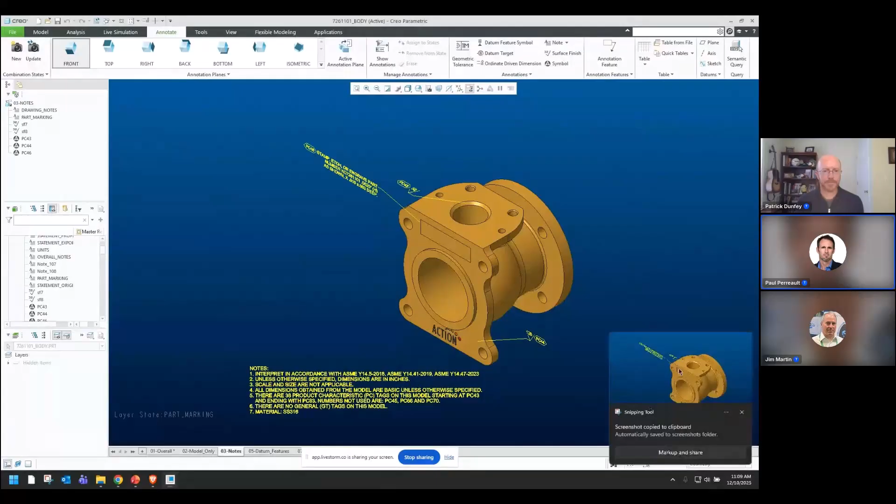And they might add comments or boxes or other types of graphical markup, and then paste that into a PowerPoint document and send that to other folks they're collaborating with. The activities-based collaboration capabilities we see here were really mimicking that type of user experience, that type of use case.

So these are what we call snapshot comments. If I wanted to create a comment, I could go and upload a photo or something like that, or add a markup to a 3D model. This whole process of using these markup tools is really to create a snapshot of the state of the model on screen, along with whatever graphic overlay markups somebody might make.

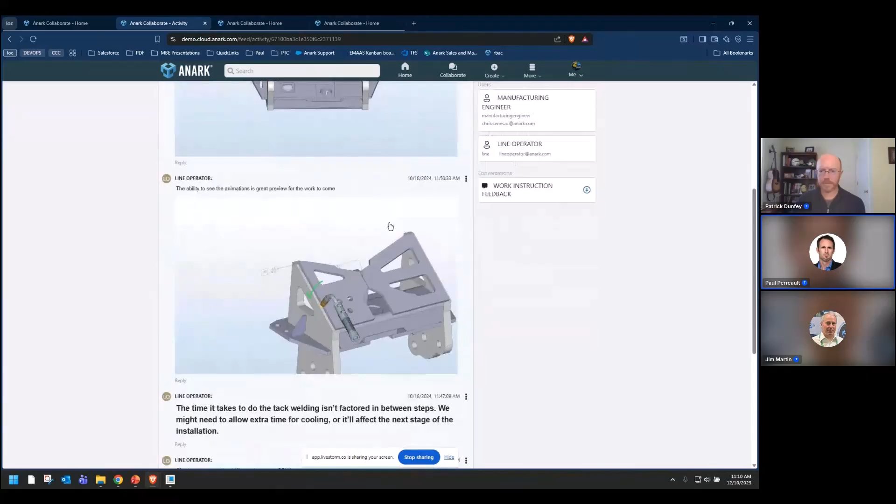So I'll exit out of this. This is primarily a time-based feed, if you will, where the things I do here are captured in a timeline, again sort of mimicking that PowerPoint slide-by-slide type interface.

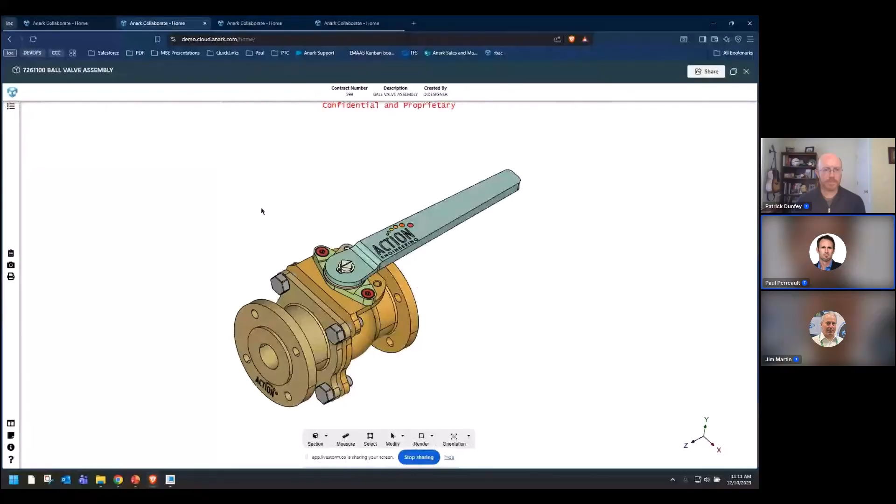So what we've introduced is this concept of content-centric collaboration. The whole idea is to really enable people to view, interact, and make graphical markups right here within this digital environment. And this is just a publishing template - some people might be aware of the templates that can be created for 3D PDFs, things like that. This environment has similar capability.

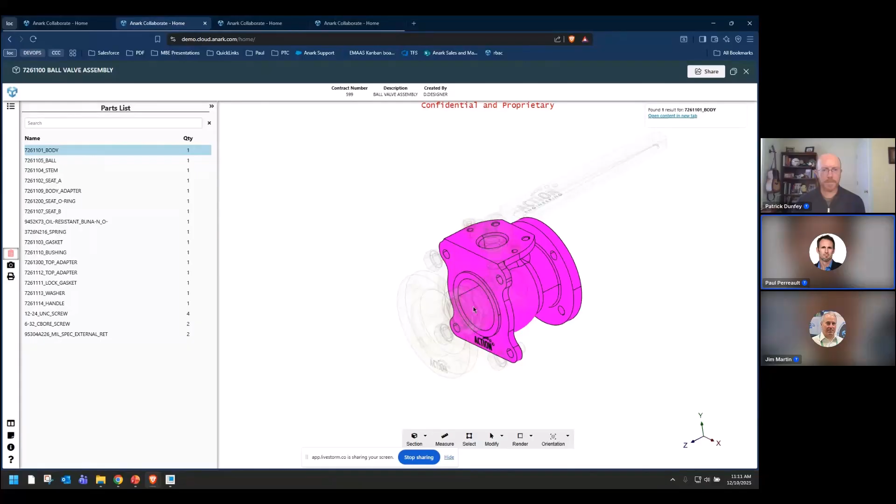Right now I'm using some keyboard shortcuts to activate different panels or widgets on the left. I can interrogate this model just like you would in a 3D PDF or what have you. This also includes some capability where I can select on parts, and in the background the system is actually doing a search to see if there are any parts that meet this criteria in the system.

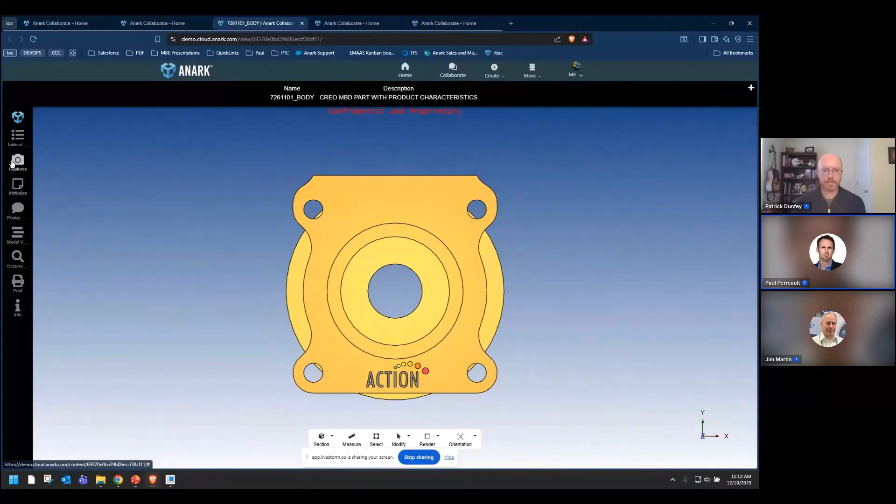And so it found one for this. I can hover over this link here and essentially display a preview of all the attributes in this particular part. So if I wanted to open up that detail part, I can just click the link, and then here I go - I'm now interacting with that detail part that's been published into the system. That's where all the dimensional characteristics are for this specific component.

And again, just want to shout out our friends at Action Engineering. This is a great assembly.

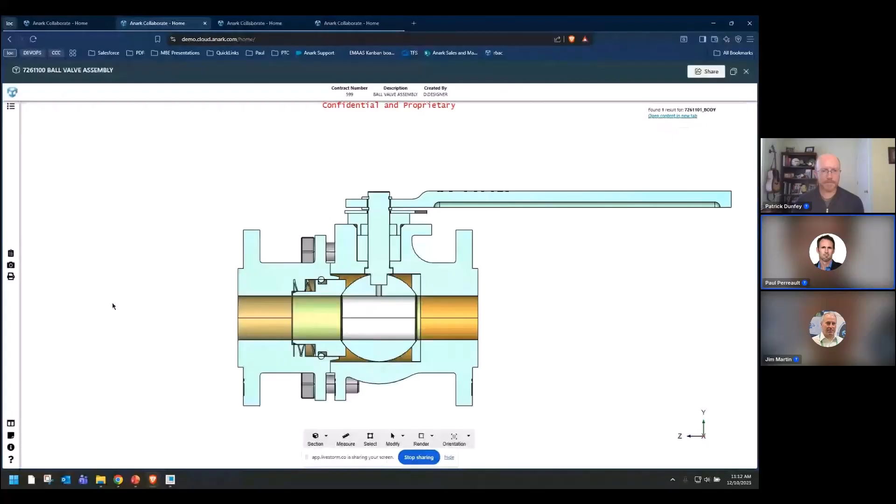Some of the other keyboard shortcuts that I have here, of course I can activate different views, things like that. I can hit those again and collapse that panel. If I want to print, we have printing capability, which is going to create what we call some derivatives from that 3D digital model definition right here from within the product - no need to create drawings beforehand.

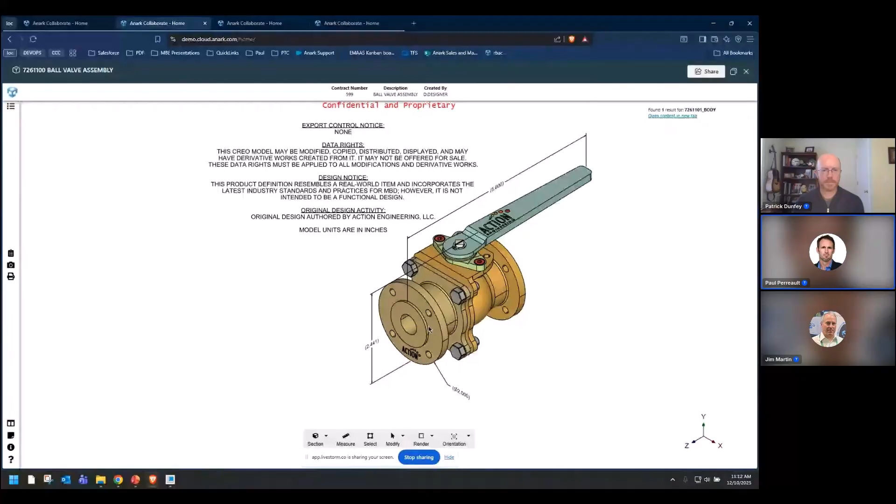So I'm going to go back here and activate this view. There's a number of different things we can do here to interrogate the model. I might want to zoom into this part, or select another component and zoom in, or perhaps hide it, show it. There's also things here.

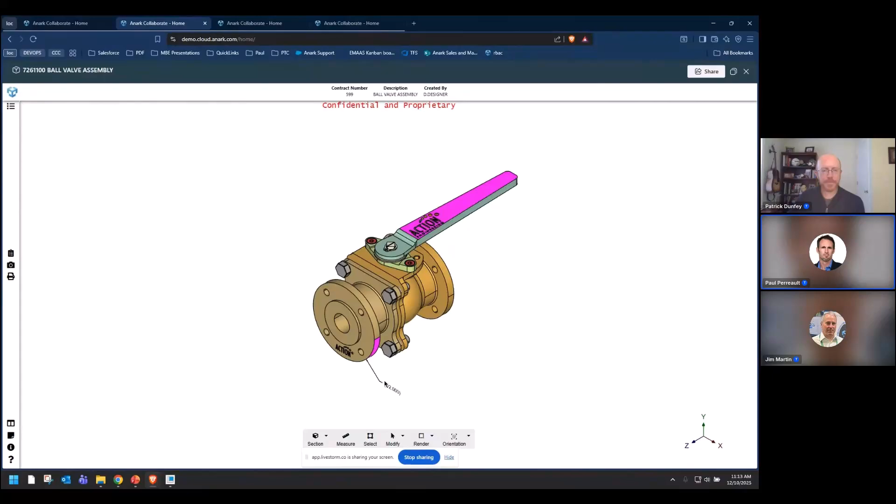Let me just select some of these parts, and I will hide those GD&Ts and those notes. The reason I'm doing this is that if I'm collaborating, there might be a particular view or state of this model that I'd like to create before I make a comment or something like that. So I'm just showing off a bunch of these capabilities built into the solution now. I'll just hit the R key, which will restore that.

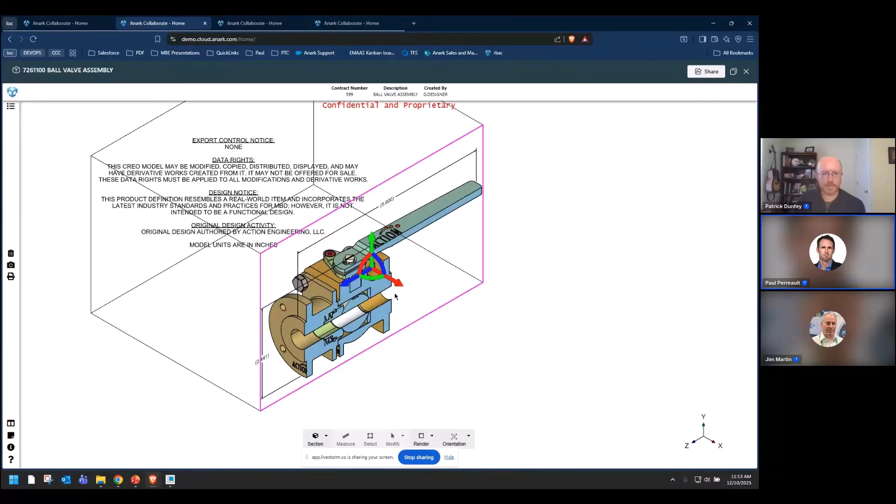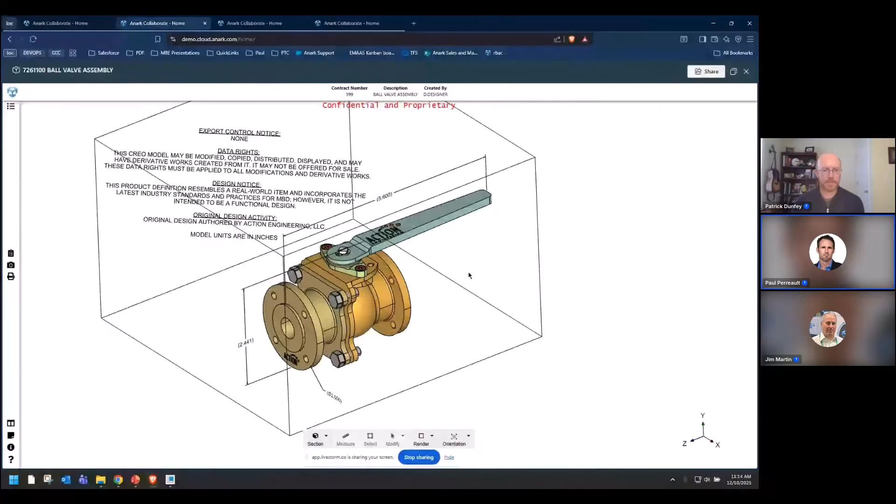New as well is a live sectioning tool. So I can just open up this section tool, and I've got six different planes that I can section. I can also rotate this tool to cut the model in any arbitrary plane I wish, and of course create what some people call box sections - really sectioning across multiple different planes to create a state of the model. This is all available as part of this new content-centric approach.

And you might have seen some of these tools before. We've got what we call a courtesy measuring capability within this environment. We're going to be adding perpendicular measurements, angular measurements, and others coming in 2026, and we're really excited to add those to these environments.

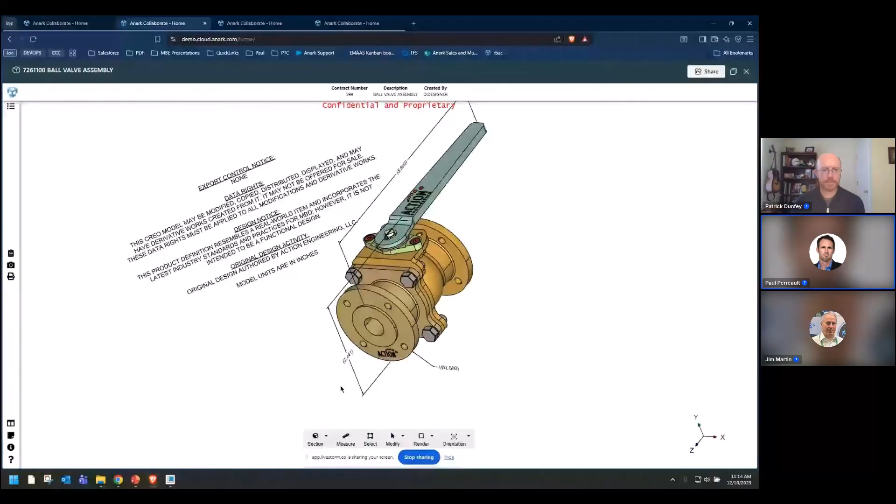Now the question is, as I've shown, I'm kind of in this read-only mode where I can interrogate the model, look at the BOM, click on things, get this sort of interactive behavior, interactive cross-highlighting and things like that. So what we have added is this way to now collaborate on this model.

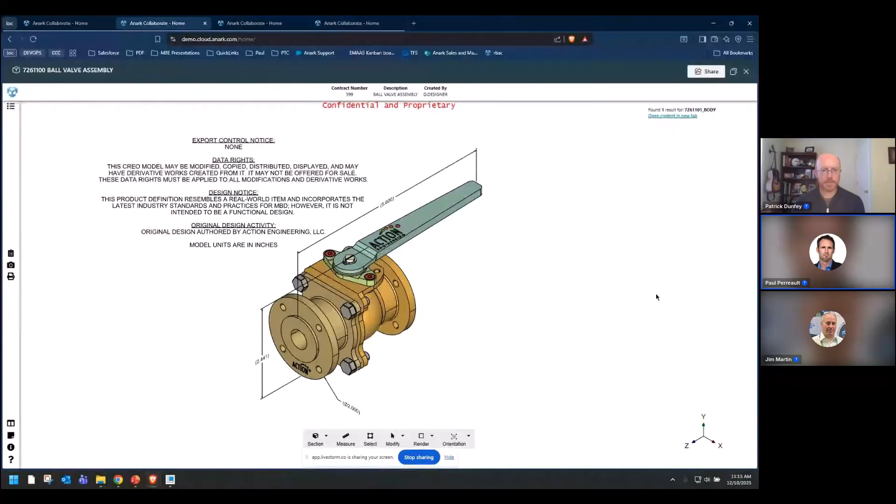So I'm going to come over here and click the share button. When I do this, it's going to ask me if I want to add this to an existing space or a new space. I'll just create a very new space here - let's call this the Ball Valve Collaboration, or CCC. I'll just give this a description of demonstration.

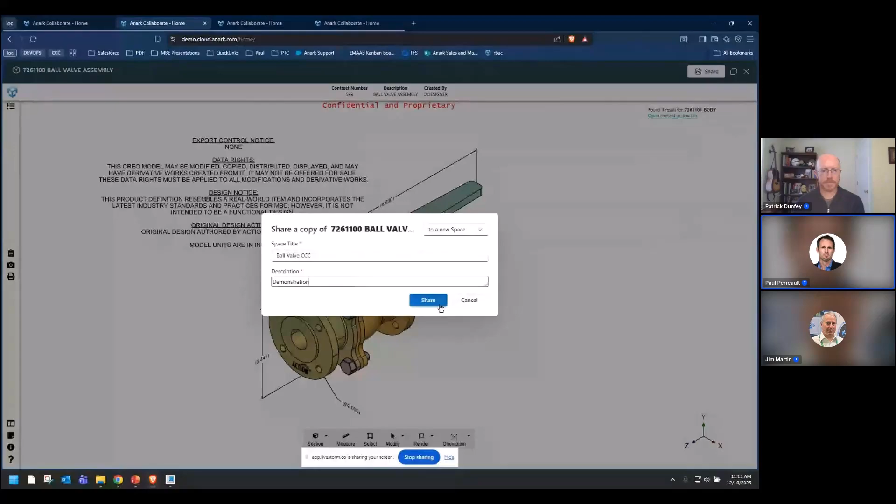When I click the share button, what's happening is it's creating this silo of information that only contains this model. So this is a container—you could think of it as a folder, but it's actually a container. And within this container, I can upload additional files, add folders, and fill those folders with things I upload from my desktop or what have you. More importantly, I can come in here to the space details and start adding additional groups or users in the system.

So I've got a user in the system that I know is a supplier, and for that supplier I will give them certain permissions within this space. They'll be able to view the items in the space, review, add markups and comments to items in the space, and they'll be able to download items that are in this space.

So again, what I've done here is created this—if anybody uses Box or Google Drive or things like that, I've essentially got a container, and I can share the contents of that container with a discrete list of individuals or groups. And for each individual or group, I can enumerate the different access permissions that they have within this space. Now that I've added some users, I'll take you through some of the capabilities here. This environment now supports what we call 3D and also overlay, or 2D, types of comments.

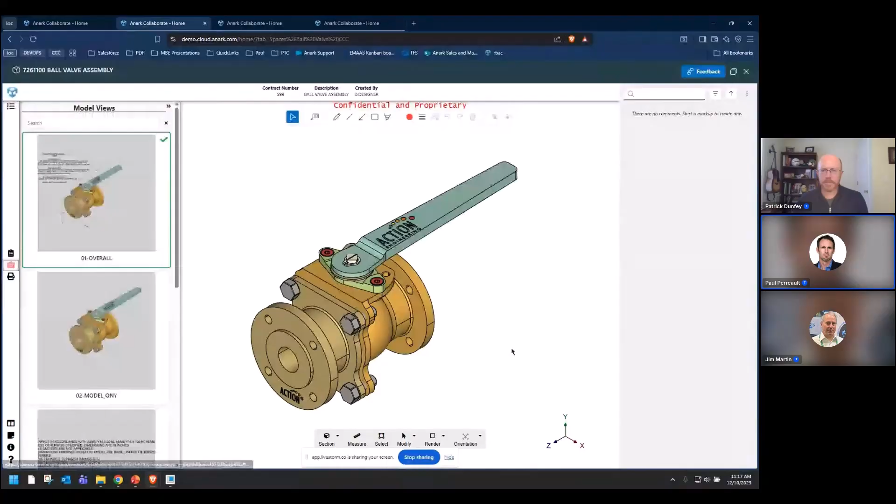So for the very first thing, maybe I'll select this part and zoom into it real close. Maybe I've got something I'd like to say about this particular part, so now I'll say what is the PN for this item. That is now a 3D comment that exists within this environment.

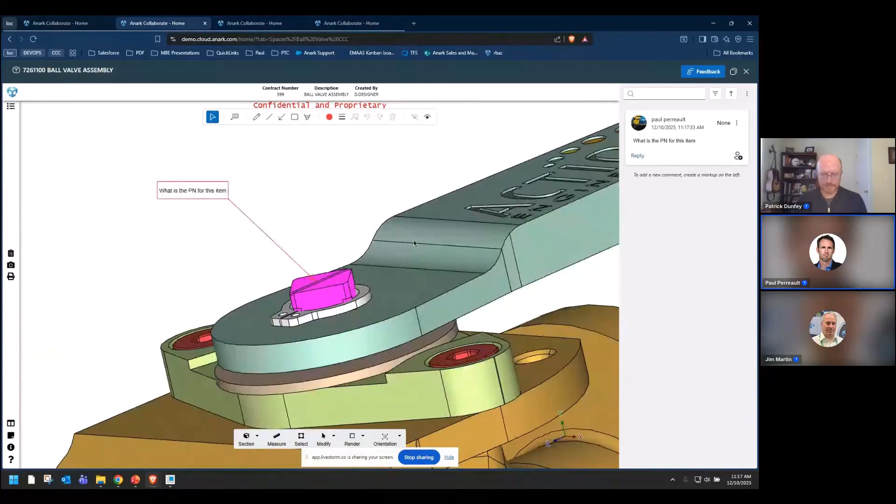Just as an example, I'm going to add what we call an overlay comment. Down here, I'm going to hit the restore button, which restores the original state of the view I was in. Maybe for this I'm going to isolate this particular part, zoom in, and now I've got what we call an overlay markup. I'll just say a nice logo, and accept that.

So what makes this an overlay? It actually exists in 3D space, but what it's doing is capturing the configuration of the scene I'm in, and adding a markup on top of that. You can see here when I rotate, that markup disappears, because it's essentially pinned to the orientation of the model, or of the view, when I create that comment.

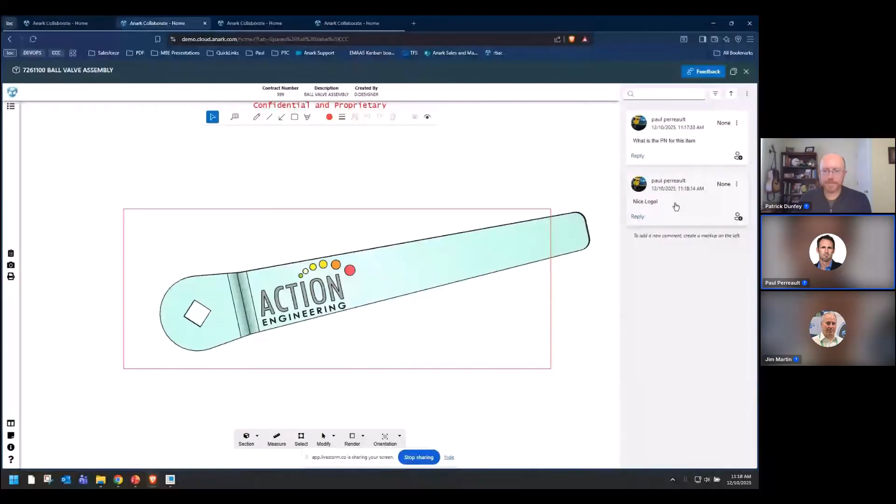Now I'm going to close this down here, and let's open up one that I've done a little bit more.

Hey Paul—yes. Real quick, just as I'm seeing you go through a lot of these things, in that last example you kept reorienting yourself back to the overlay markup. How were you doing that? I think I saw you clicking the things on the right, but I'm not sure exactly if everybody saw how you were doing that so you could get back in there.

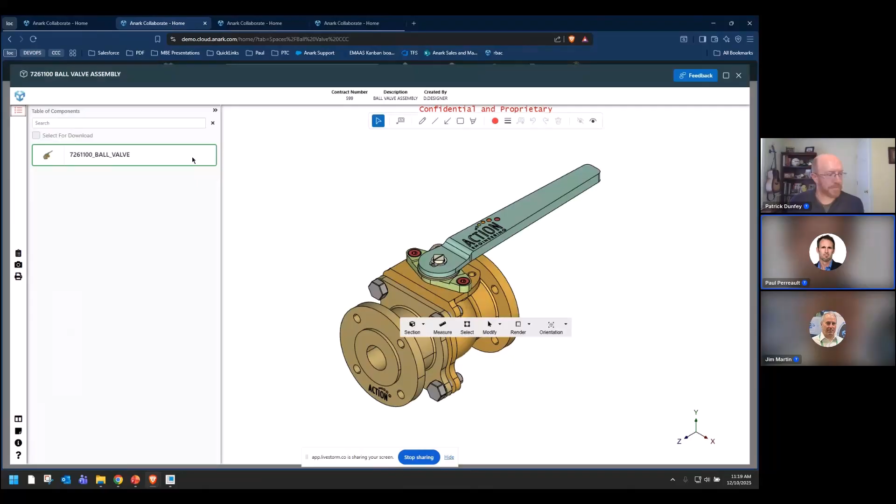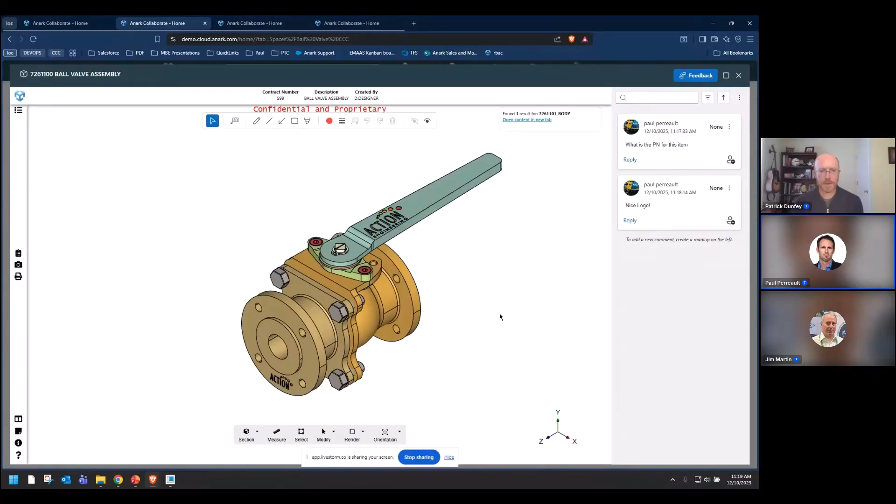Yeah, so great question. Let me just close down the table of components there. So every comment corresponds with a graphical markup that's been created either as a 3D markup or as an overlay markup. Here I'm in the live 3D digital environment, I might choose to hide something or isolate it, and I'll hit the R button to restore. But now when I click on one of these comments, it takes me back to the view and state of the model that comment was created in.

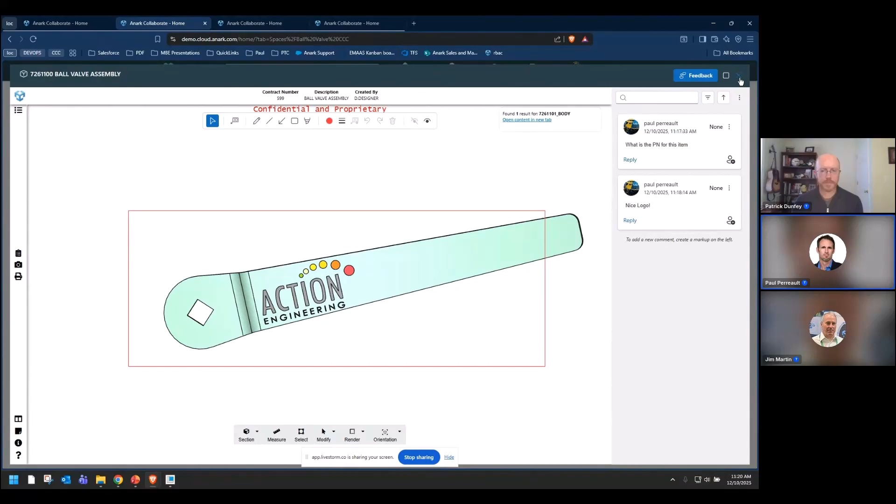So again, I can zoom in and out here. You'll see that this is what we call a flat-to-screen type note. And if I wanted to, I could come over here and activate that overlay markup again. Now, probably the better place to show this is in the context of a more elaborate, more fully defined collaborative experience.

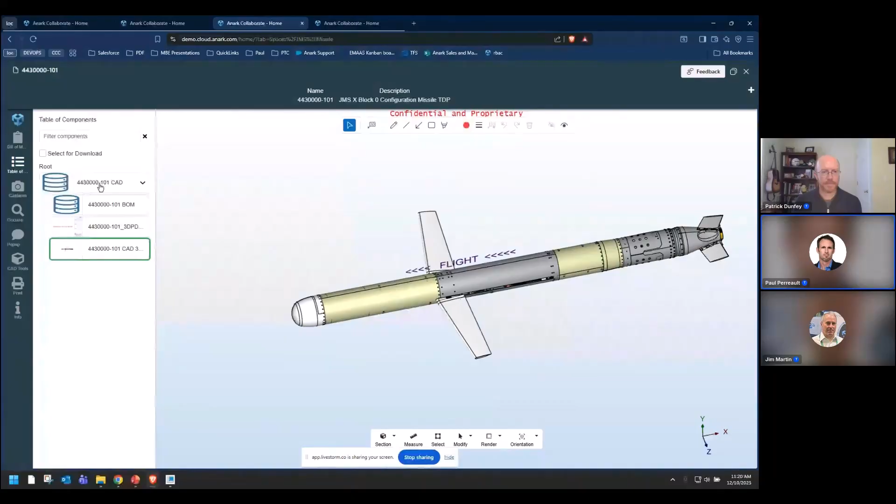So what we're looking at here is a complete missile. This is probably about 1,000 occurrences, a couple hundred components. This was published out of Windchill, and in doing so, you can see here that we've got this hierarchical representation of information.

So this is what we call a top level cover sheet, which contains PLM attributes that were harvested from the WT part in this case. It also includes a bill of material, again harvested out of Windchill. As I mentioned, there are several hundred unique components in this structure, and so this is the full recursive bill of material, not just top level. This is data, again, not CSV, not Excel.

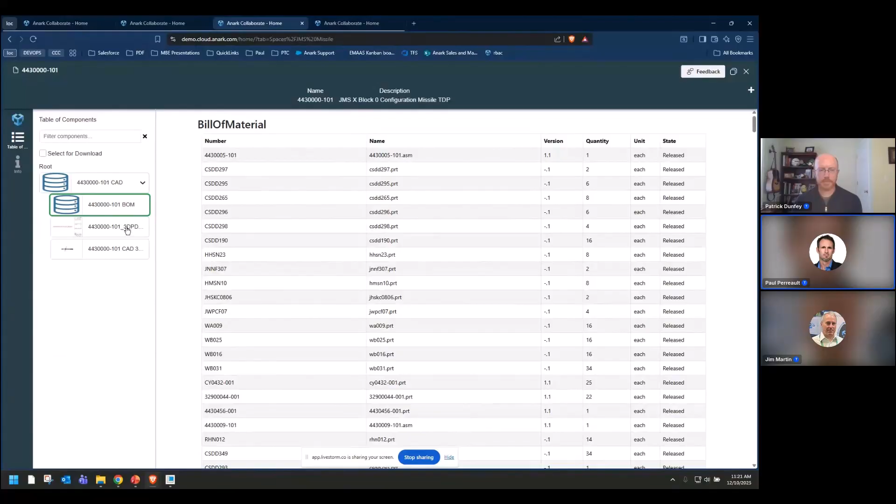This is data that was harvested right out of Windchill. The integration also published a 3D PDF as part of this package, but then also provides this interactive digital environment here. So what I'm going to do now is turn on the feedback panel, and you can see here that there's about 20 different comments and replies that have been made.

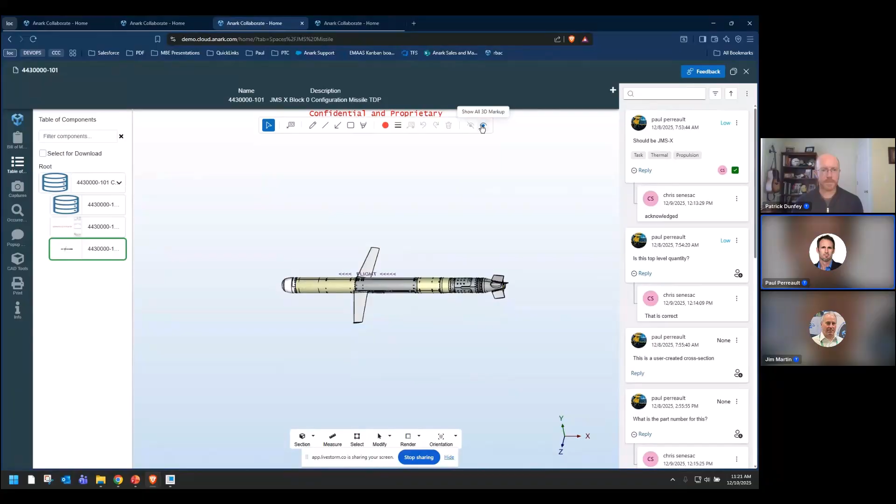While I'm in this environment, I have a couple of different ways to see all these comments happening in this content-centric environment. The first thing I'm going to do is click this button, which will show all of the 3D comments that have been created in one view. You see here I can rotate this model and see these different pinned comments attached to various places within this missile. One of the great things about this environment is that there's this sort of cross-highlighting relationship.

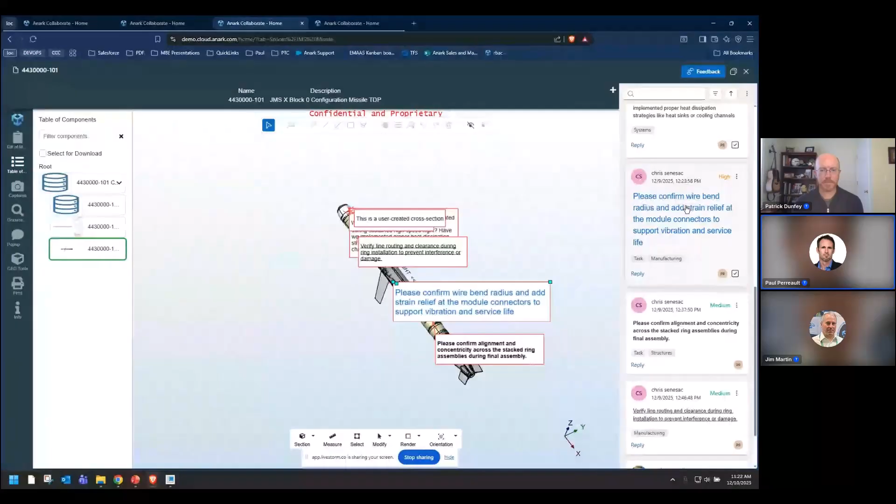I'll click on one of these items, and you'll see here that this comment turns red. I'll do that again - you see there's a red border that comes and highlights that comment. This provides me a way to see that this comment corresponds with that item in the comment history. When I see that, I can click on this item, and now it will activate that saved configuration and saved view of the state of the model when that 3D comment was made.

Just to be clear, this is a real 3D comment. This is not a snapshot, not a capture. This is a flat to screen note that has been created and pinned to this particular wire harness. And of course, this comment here is asking, hey, do we need a strain relief piece of hardware to maintain the bend radius of that cable?

Each one of these items in this list corresponds to a different component here in this data package. Starting at the top, this was a 2D, what we call a highlight type comment, where I just highlighted this text and typed in a comment: shouldn't this be JMS-X? You can see here that Chris replied to that and acknowledged it.

There's also an indicator here that this item has been completed, and I'm going to show you some capabilities in just a moment to disposition and adjudicate all the comments that people make in these collaborative exchanges. This one relates to a selection of text in this PLM attribute data.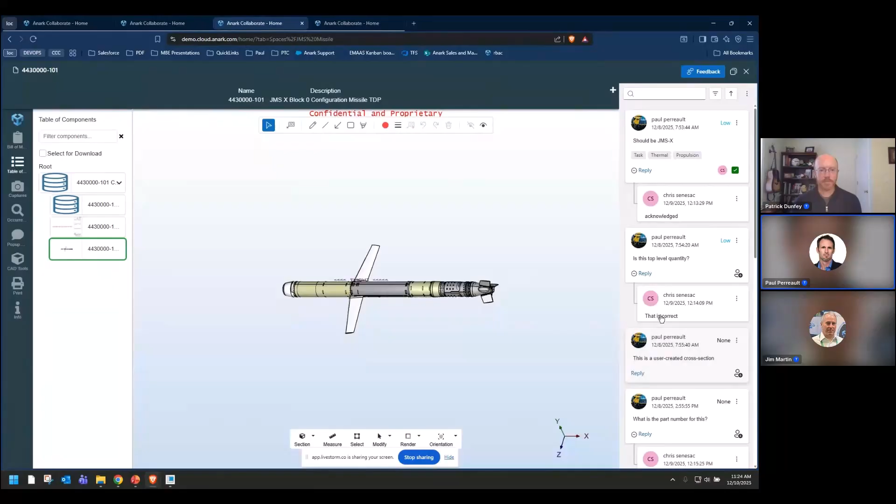And then here again, this is another comment - a 3D comment in this model that is actually using a user created cross section, using that tool I showed you before. Each one of these is capturing the state of that model, whether parts have been shown or hidden, or what have you.

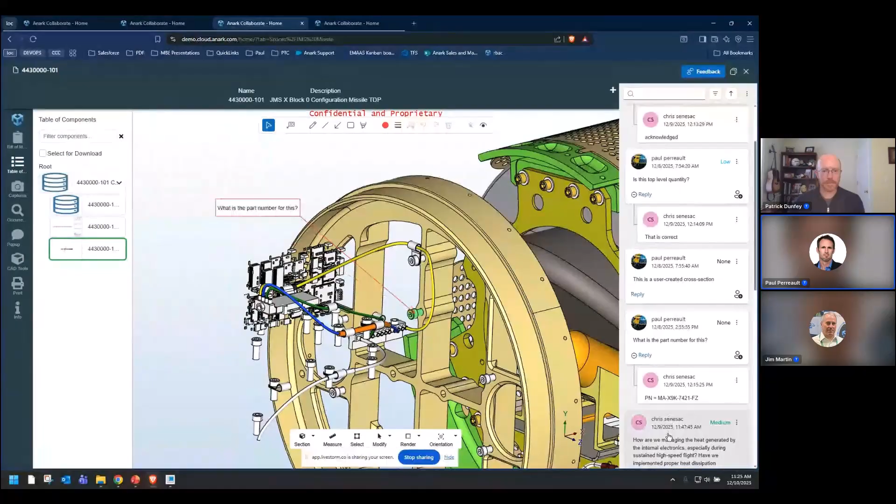We can create leadered flat to screen notes. I can also create basically just an unleadered note that looks like a flat to screen note without a leader. Each one of these is capturing the history, capturing all the comments, all the graphical markup. You'll notice here that you can use different text styles - bold, different colors, underlines, things of that nature.

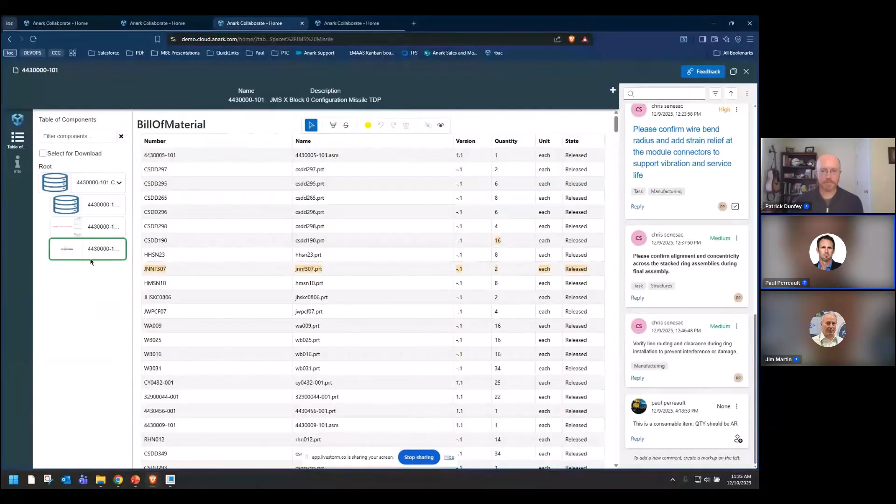Here's another one in the BOM - shouldn't this be as required? It's a consumable. This is a very robust set of tools that works across what we refer to as all of these different content types. And those content types are 3D, hardcore model-based definition, digital engineering data, as well as data that accompanies this in the package. Again, it's totally up to customers what they'd like to publish, whether just models or downloadable items and things like that.

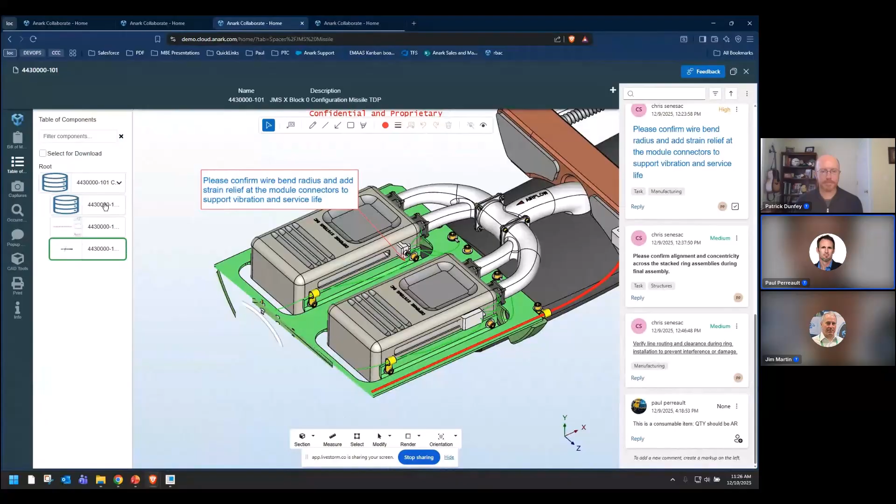So let me just jump into a different environment here. I'll close this down and let's open up one that's got a little bit more going on. I'll open up this - this is again the detail part from that ball valve assembly.

There's a couple things here that I'd like to show off. First, I'm just going to hide that panel. So we're just here and I've got this thing called the occurrence viewer.

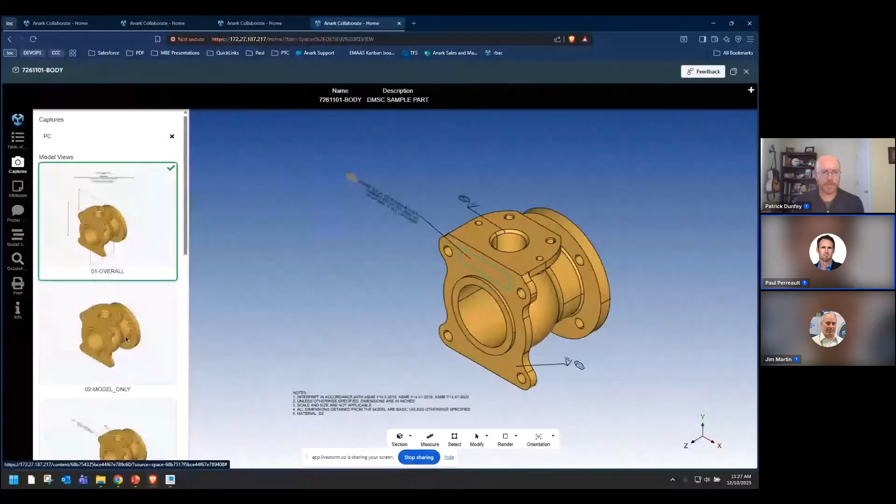This isn't just visual data, this isn't just 3D graphics. Anark translators and what we call our advanced MBD adapters harvest all of the semantic data out of these parts and assemblies as well. So what I did here is I just filtered for all the product characteristics in this model, instead of navigating it by all of the captures that were published, which were defined in Creo as combination states.

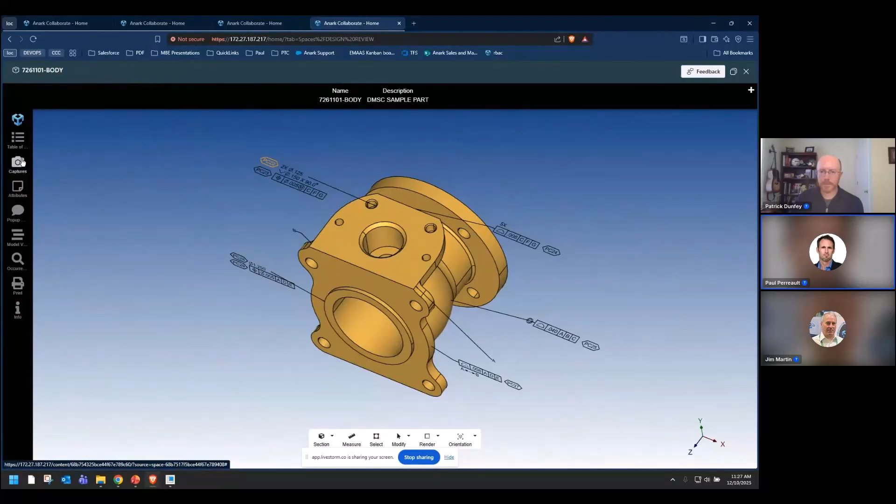As an alternative, I can use this list of product characteristics to perform a tour of this model. This helps me not only interrogate the model, but also better understand the design and manufacturing intent and the requirements for how to manufacture and deliver a part that meets those requirements. So this deep semantic information enables several different ways to interrogate this model to better understand the design intent, et cetera.

Now I'm going to close this and open back up our feedback panel. So we have what we call overlay 2D. This is a box essentially, or an annotation that's been drawn around the export control notice. As soon as I rotate this, that annotation, that overlay disappears because it's no longer relevant for the view or the orientation of the model that we made it on.

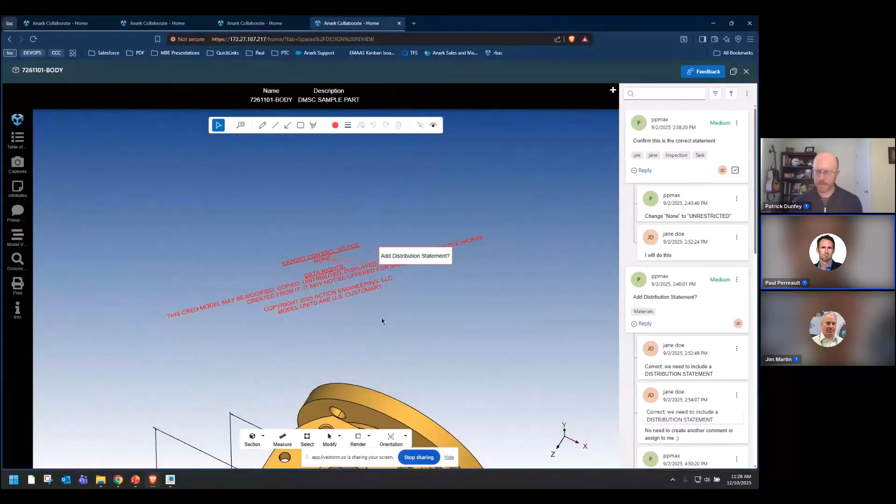Of course, we can also create 3D annotations on actual GDT. So this is a 3D annotation that is referenced to the entire export control note that was published.

As we go through here, you'll see that there are these indented comments - these are replies to the parent comment. One of the neat things is that I can click on this, which is like a quote, and it will highlight the reply that it references. So there's all of this great relationship under the covers here that the system is keeping track of, who replied to what and what was quoted or replied to, et cetera.

So all of what we would refer to as the model geometry, the GDT, the supplemental geometry, you can comment on all of that stuff.

Now, one of the things we also heard from folks using the activities-based collaboration solution is that we had this idea that we were sort of capturing snapshots and pasting them into quasi PowerPoint slides. But when you have a lot of people collaborating, you really want to have a way to come in and then adjudicate and disposition each one of these comments so that you can quickly arrive at next steps or business outcomes or identify follow-up tasks in an external tool or what have you.

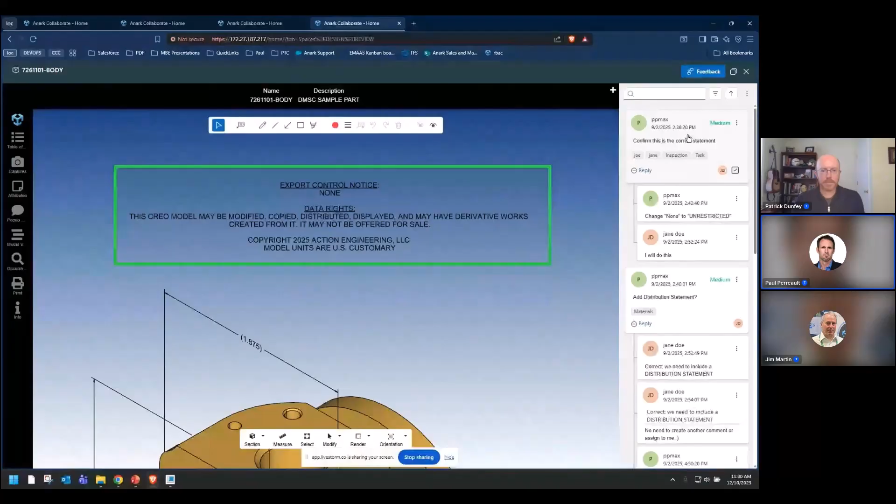So I'll just point out a couple of things here. Each comment has a number of what we call dispositionable characteristics. I'll click on this item and let's just go into edit mode. The first one is what we call arbitrary metadata tagging - I can just add a new tag here.

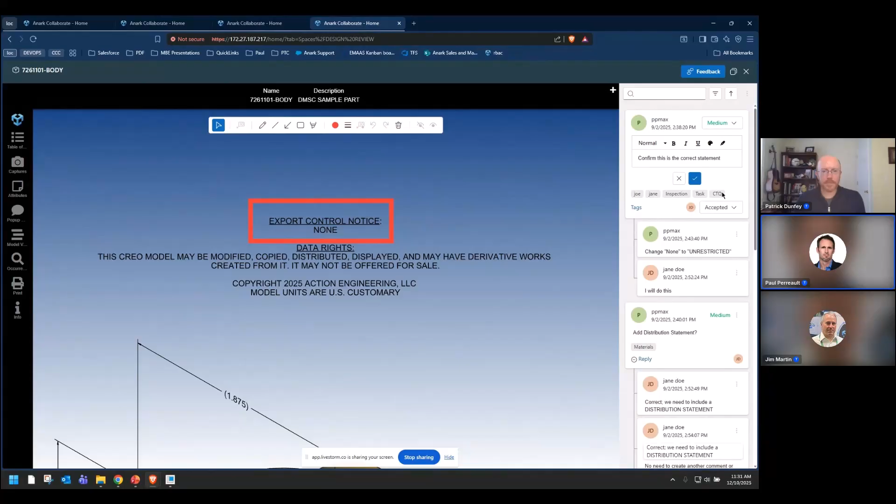Let's say we're reviewing for critical to quality characteristics, so I just type in CTQ here and I can create that tag, and now it gets added to the set of tags associated with this particular comment. Each one of these tags is then available for others, so that they could add their own or reference tags that are already in the system.

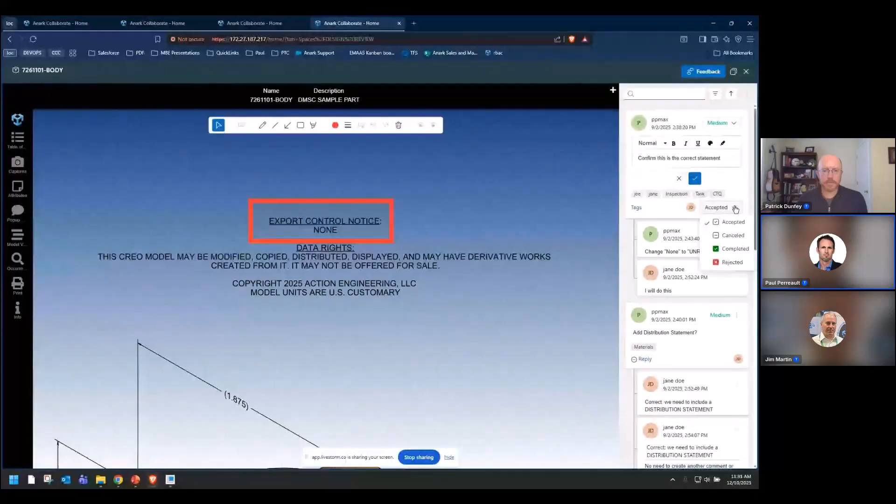Now, in addition to that, you'll see here that there are some drop downs - this is essentially a way to prioritize, assign a priority or criticality to a comment, and folks with the proper permissions within this environment are able to do this. We also have a series of elements that can designate whether a particular thing has been accepted or canceled, completed or rejected. So I'll just post this, and you can see here that we can assign these to people as well.

Now, each one of these comments can have all of these different types of characteristics applied. So if I'm collaborating with several people, and we've got hundreds of comments here, I'm going to want to be able to filter by priority, or perhaps to show things that have been rejected or completed or canceled. Whenever I do that, it's filtering those in real time - it's instantaneous, a very interactive environment.

Let's clear that. I might also want to go here and show all of the tags that were related to, say, critical to quality. You see that one comment that has that critical to quality tag meets that criteria.

Anytime you filter something, you might wish to sort that data set or that result, ascending or descending. So now what I'm seeing is newest on top versus oldest on top.

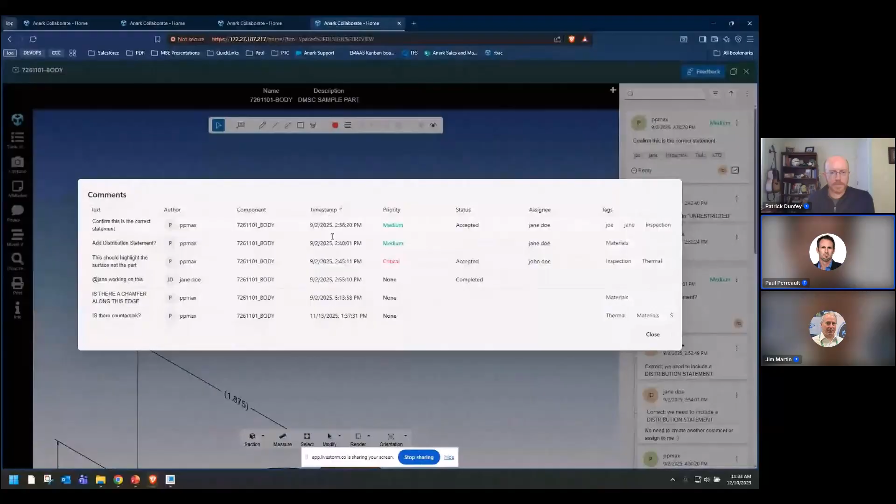This interface also provides what we like to call the inspector view, which is really a tabular representation of all of the comments and all of the dispositionable characteristics. And so I can just quickly and easily sort by author, component, timestamp, priority, status, tags, assignee, et cetera.

And so the point of this, again, is to provide this horizontal CAD and PLM neutral solution such that organizations can publish data into this environment, just like they do with 3D PDFs.

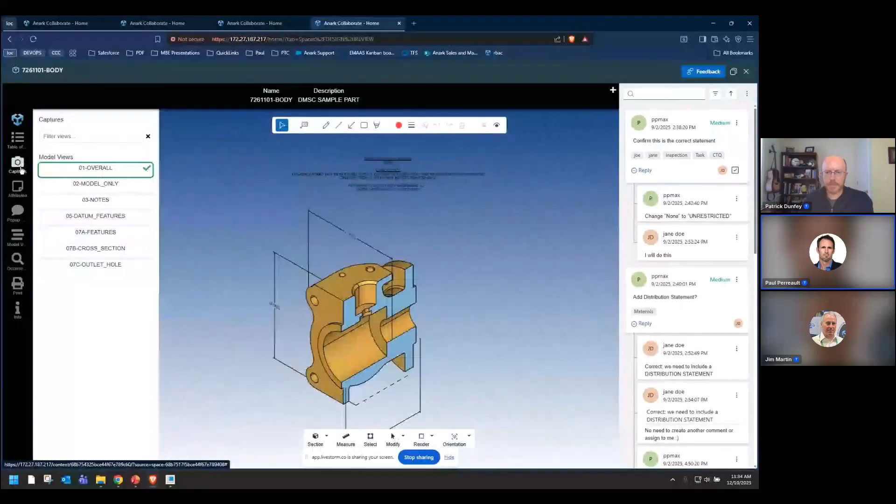And once the data is in this environment, we can then have these collaborative exchanges, albeit in a totally secure, what we call a fileless environment that doesn't require that I'm distributing documents to people and sending them out and then collecting them and bringing all those red lines and comments back together, say like in a PDF drawing. This environment is really trying to provide the digital thread equivalent of that document-based collaborative experience.

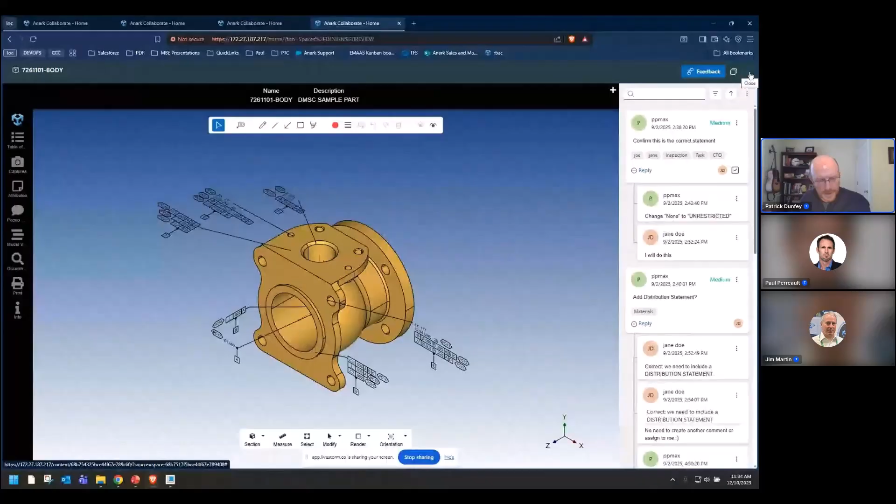So there, Paul, there's a question that came up. It's the usual question that comes up. I felt like it was the right time in terms of what you just mentioned. This data was managed in the PLM system. Some of it you've mentioned, some of the PLM systems that we work with, but what's our vision, or how does this work back and forth? How does this work with PLM to complement the change management process or any other workflow process versus just being off to the side?

And so Anark's strategy is not to warehouse this data. It's our intent, again, to be this horizontal meeting ground solution where people can gather and mark up and comment. And then once that's done, to federate that data back into PLM, where you might want to attach it to the item revision or add it to a change process or what have you.

And so what we have today is this ability to create these PDF reports. And what we're working on is an ability to export this data, everything that we showed you, as a machine readable representation. So that's probably going to be CSV if we'd like to export this to disk.

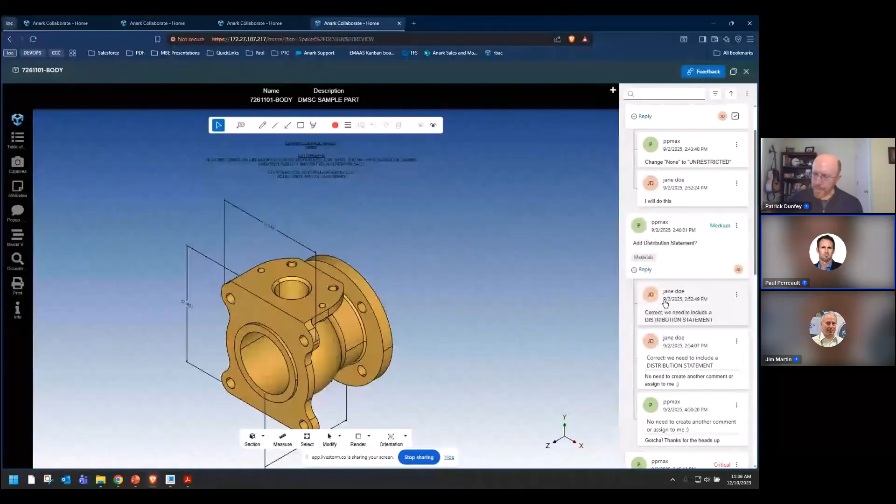But then also we're going to be able to suck the data out of this space using our PLM integration and then federate it back to the original item revision that was published into the system to provide that closed loop: publish, collaborate, and then bring that set of comments and actionable items after dispositioning and adjudicating.

You might wish to publish all of these just to provide a complete sort of history, but you might also wish to federate just the outcomes. And so those outcomes might be those 4 or 5 comments that were accepted.

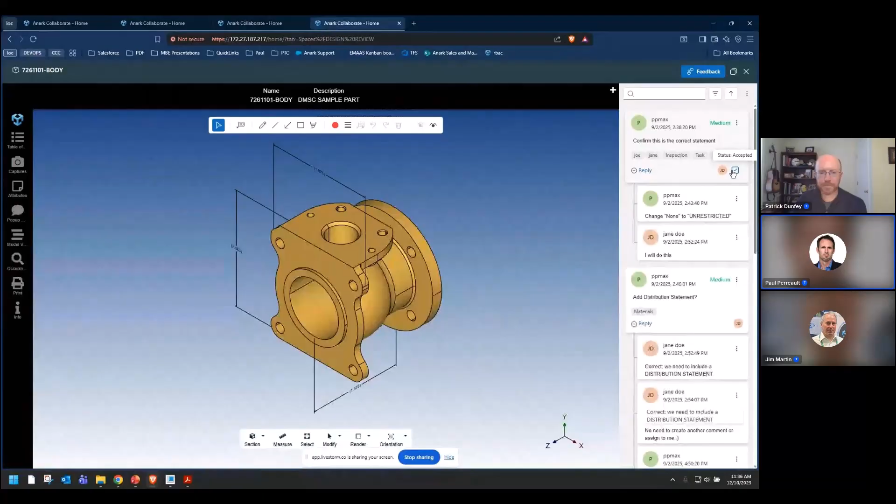That's going to be coming in 2026, along with a whole bunch of new things that we'll show you here in just a moment. This is more than just an environment to view technical data.

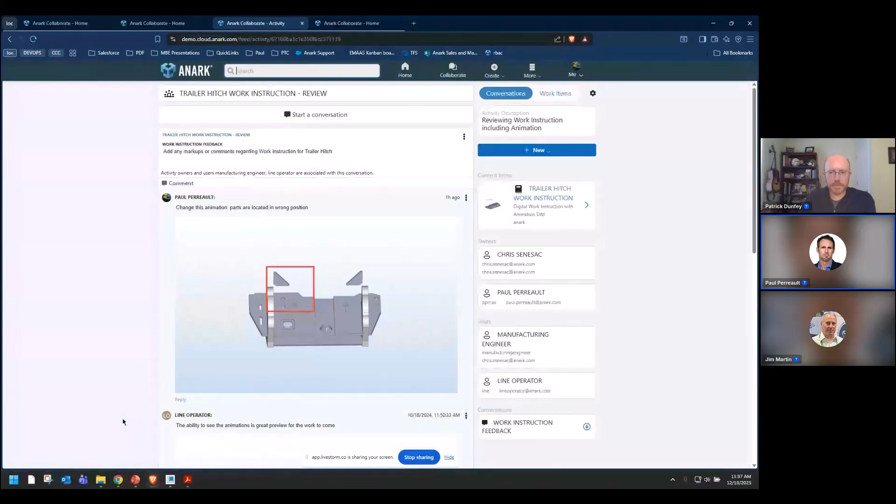We have customers that are publishing work instructions into this environment. And so before publishing those work instructions, you want to be able to review the work instruction and make corrections or suggest changes or what have you.

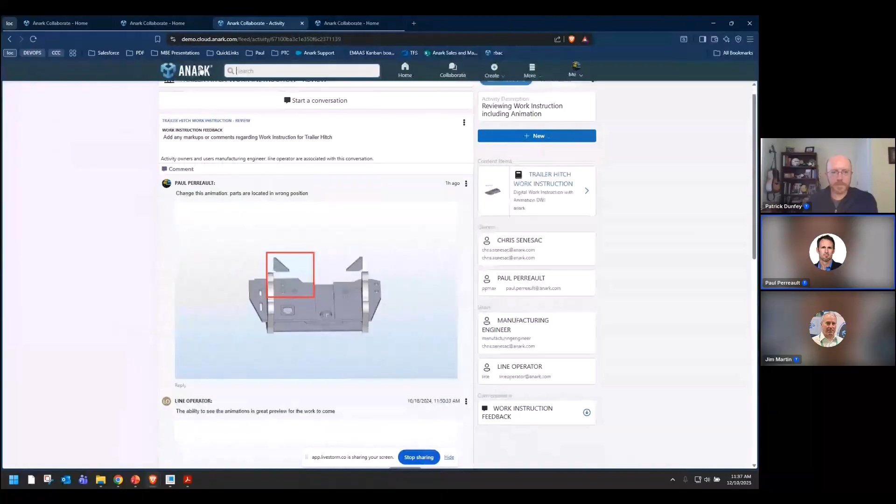And so this activity is really emblematic of what some of our customers are doing. They'll publish an animated work instruction into this environment. These work instructions are authored in our Anark Workstation product.

In those work instructions, somebody is enumerating a set of different sequences or steps. And within each step, they might have occurrences of the assembly that are being added. There might be some elaborate animation like this to show welding and tacking on different components and things like that.

And so these types of publications, just like a 3D PDF, you can publish work instructions into this environment.

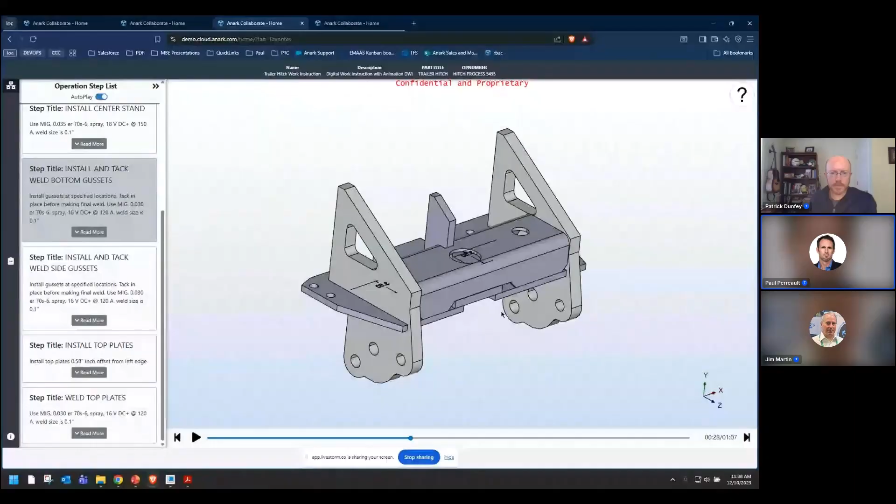But where I'm going with this is that you want to be able to collaborate in a way that is model based. And so I'll go back here into this environment and let's go and open up a different space. Got a 3D work instruction, content-centric collaborative experience on that same work instruction.

In this environment, we can play each step, things like that. But now I can add 3D markup to this. This is not a screenshot. This is not a capture or a snapshot. This is one of our 3D comments.

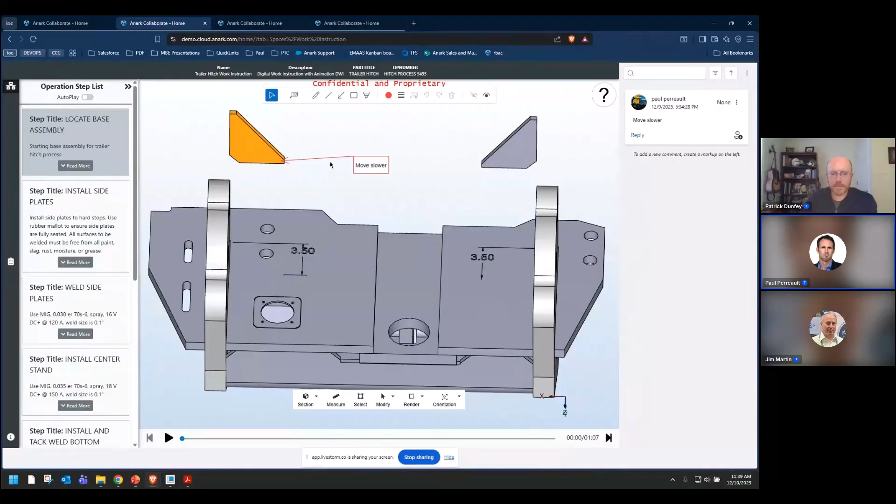And so it just provides a much more intuitive and I think much more direct experience with that digital product definition data. And then again, to be able to facilitate people reviewing and marking these things up before they release it, that's where we see a lot of value for solutions like this.

So we did have—I've been trying to figure out the right place to put these.

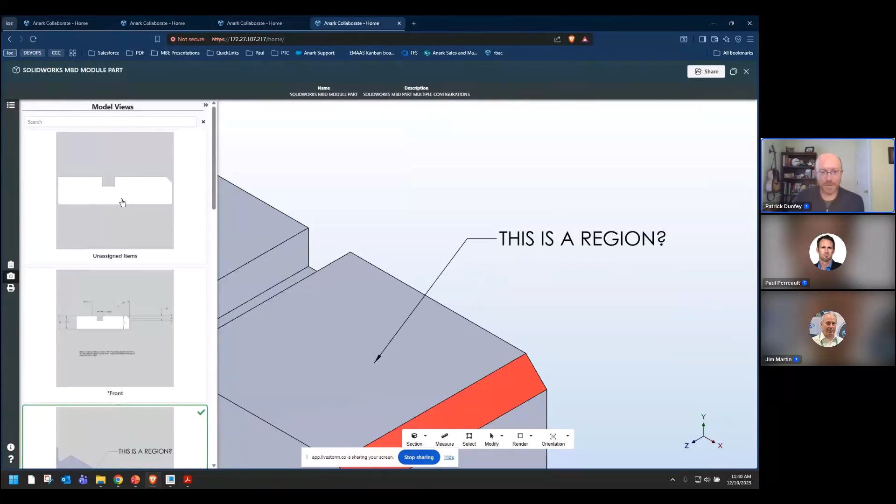We did have another question earlier that got to what use cases are supported. What I think would be interesting is that 'spaces' is a pretty generic term for this set of capabilities, but that's by design, because whatever your collaboration process or workflow is, you can create a space for that and it becomes whatever you fill it with.

Can you connect that to what we do with templates and our vision around templates, and what you just showed in terms of two different versions for two different use cases, and tie that in to answer the question around what use cases could be supported here?

Yes, that's a great question, and it touches on a system extensibility story as well. One thing we've learned from supporting 3D PDFs is that customers want to design a deliverable that displays and provides information and interactivity specific to particular use cases or types of deliverables. So this technical data package notion might contain a bunch of attachments, and it might have buttons in that PDF document to show the attachments panel or related documentation, things like that.

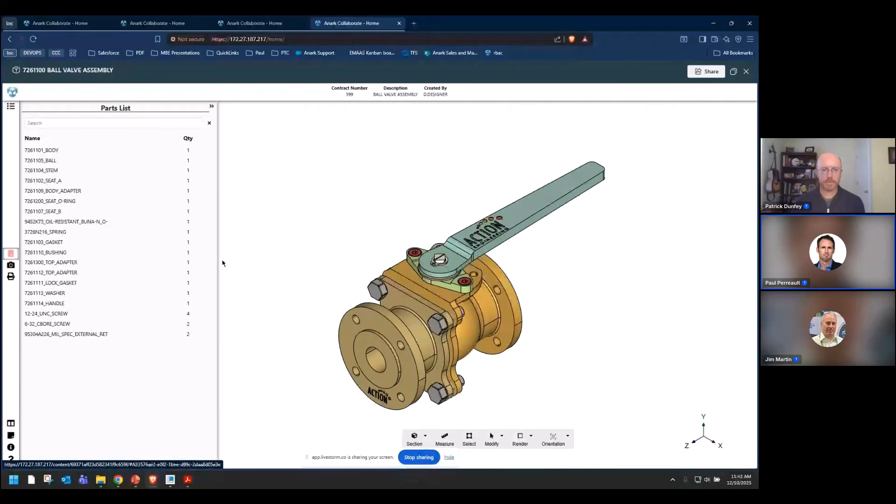The same is true in this environment. We want the ability to port different application experiences or different templates. Generally speaking, this assembly was published into a template that looks like it does here. We'll notice this other component was published into a template that looks a little different, with a different set of widgets that provide different functional characteristics. As an example, this model is demonstrating the extent of the system capability as we speak.

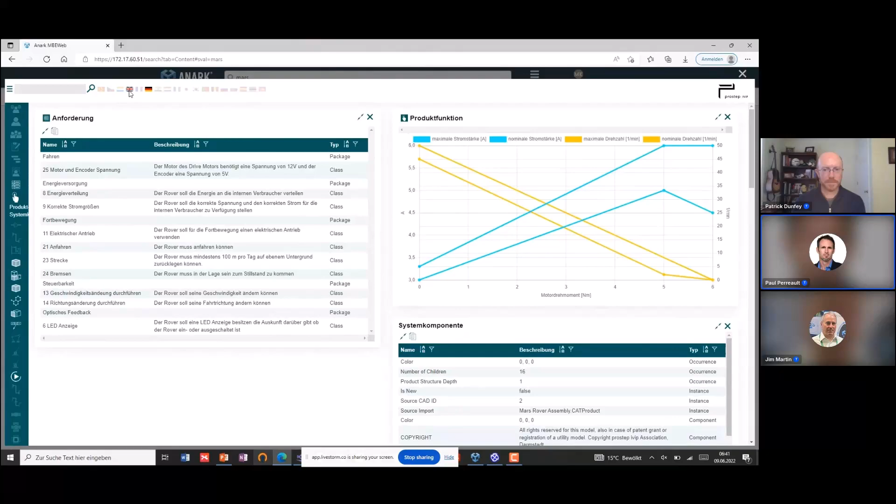One of our partners, Engineering Methods in Europe, has been working on what's called the Cascade project and something known as the digital data package for several years. They built their own bespoke application on top of Anark Collaborate that has no similarity to anything we saw before, not only in terms of user experience and interface, but the digital data package also incorporates a completely different data model.

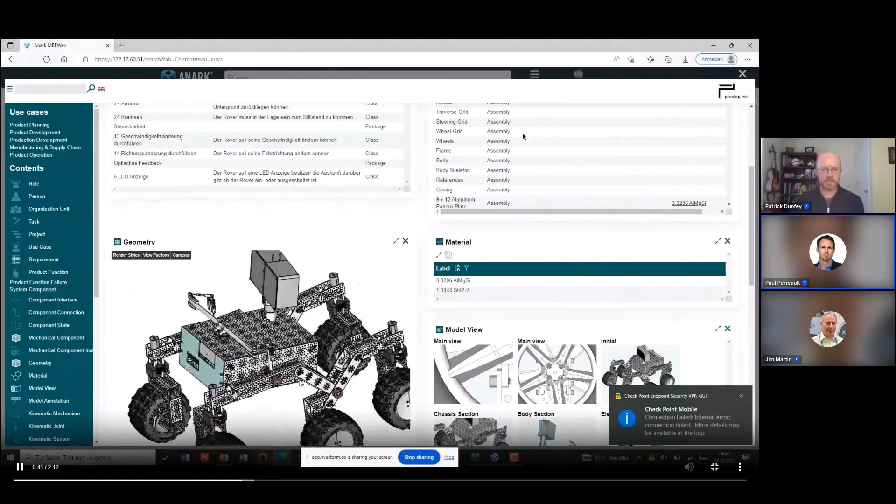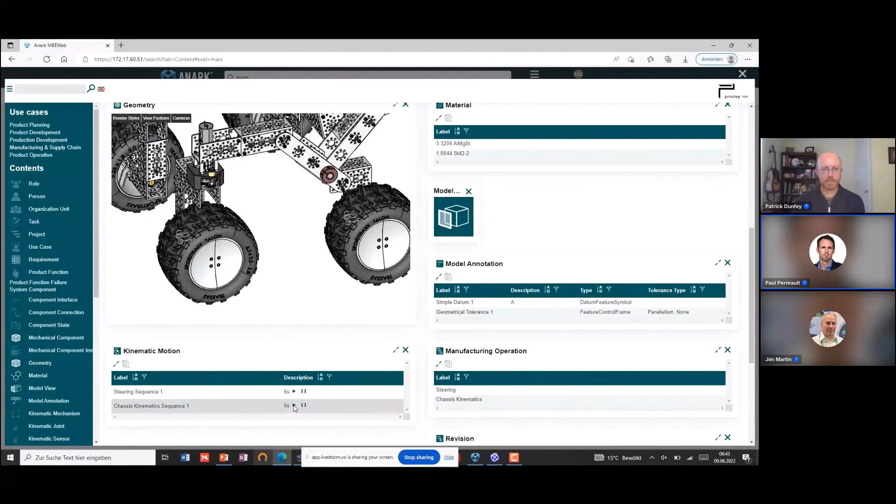Our environment can incorporate that data model. What's going on here is that a digital data package is different than a technical data package in that its goal is to provide a standard way to describe the entire systems engineering requirements, inspection, and all the related characteristics of that product definition, including not only the CAD, but also the requirements and information you might define in Cameo.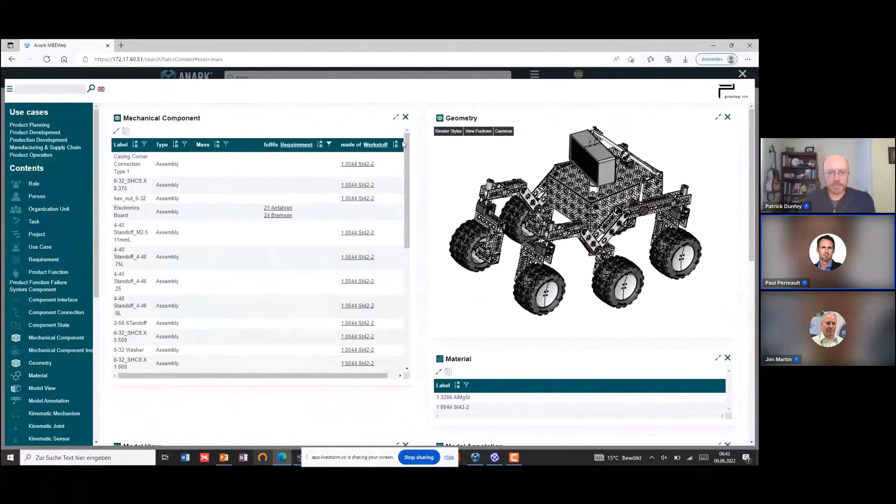This application that Engineering has built is a way to ingest all that information and create relationships between it, such that a user can interrogate the systems model that describes this Mars rover right here. This environment was designed to be extensible, and we're going to expand that extensibility coming here in 2026.

Does that answer your question? I think it does, and then some. This is great, thanks Paul. Yes, so the phrase 'there's a space for that' may have to come into play, and then an app experience to go with it, based on what you're saying.

Good stuff. Yes, in the space — maybe just to recap a little bit — the idea behind a space is to provide a siloed area. You might have hundreds of thousands of items published into the system. In our experience working with customers in the industry, there are a variety of different access control methodologies that people utilize or have deployed within their organizations.

This environment supports 3 completely distinct access control models out of the box. One is that some customers define access control privileges within PLM for internal people or even suppliers — a record that says John Doe can access this information and download or take possession of it. Those privileges are enumerated and defined up in PLM, and this product can be configured to delegate all access control to that external access control authority. So that's one mode.

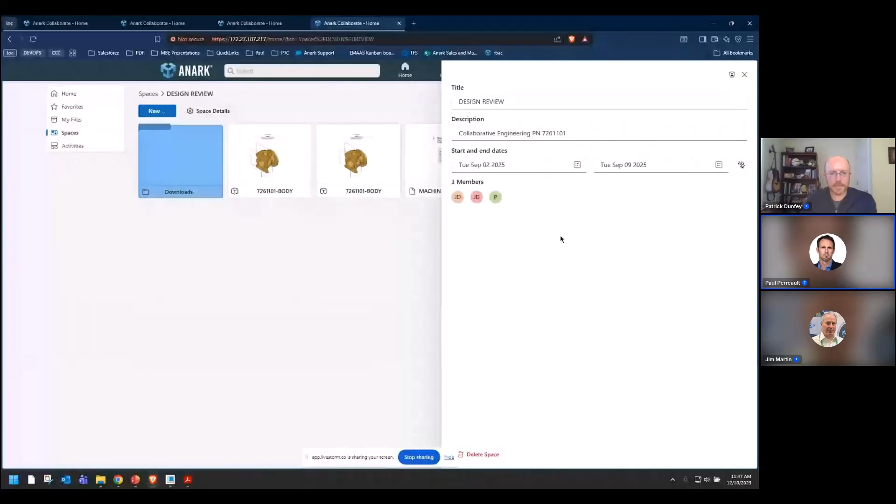And the third way is what we call the local access control model within the space. Again, a space creator — somebody who has the privilege or permission to create spaces in the system — can add individuals to the space and then define for each user what they should be able to do within the space.

And so it's this very flexible, but ultimately out-of-the-box configurable solution that we offer.

Excellent. Hey, by the way, bonus points, you just answered another question on access control without me asking it. Good work there. Letting you know, we've got about 7 minutes left to get through the rest of the updates and some of the slides you have, and then we can hand it over to Jim to take us home.

So this is all what we refer to as a multi-phase approach to extend this application, adding new improvements to the user experience. What you're going to see now is where we're going in 2026.

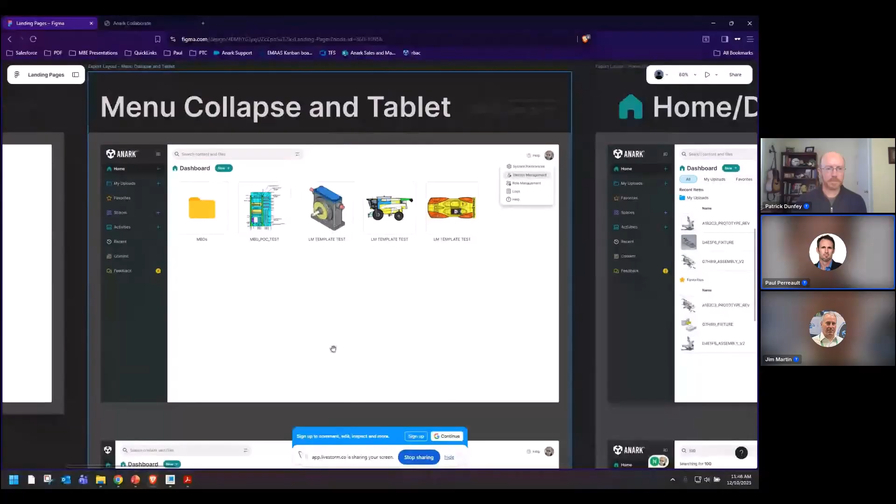So what we're looking at here are a collection of user interface mockups. These are being created in a tool called Figma. This set of mockups shows where Anark is going in 2026: a complete application overhaul to enhance and modernize the user experience.

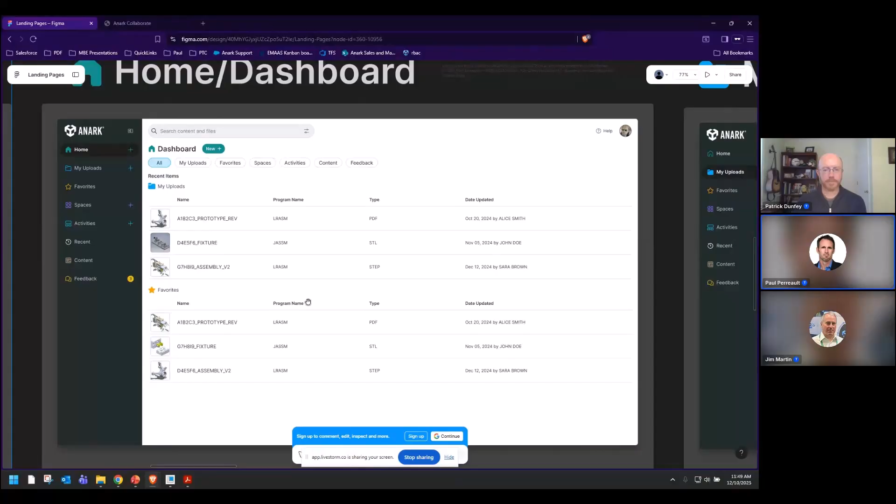One of the things we've heard from our customers is that they'd really like to reduce whatever training might be required to onboard people within the system. So this has been inspired directly from common tools almost everybody uses: email clients like Microsoft Outlook, and a lot of folks have experience using Box.com or Google Drive. It's taken inspiration from those environments.

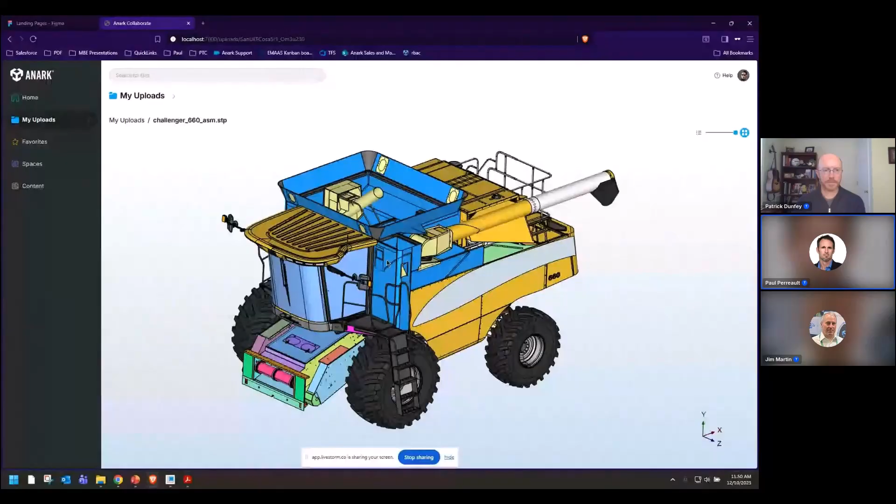And I would also say this isn't a dream that we have, this is a working environment. So this is the new, what we're referring to as Collaborate 2. Substantial progress has already been made on this environment, and we'll have more information about when it's scheduled for release in Q1. So a fully functional environment is already substantially underway here.

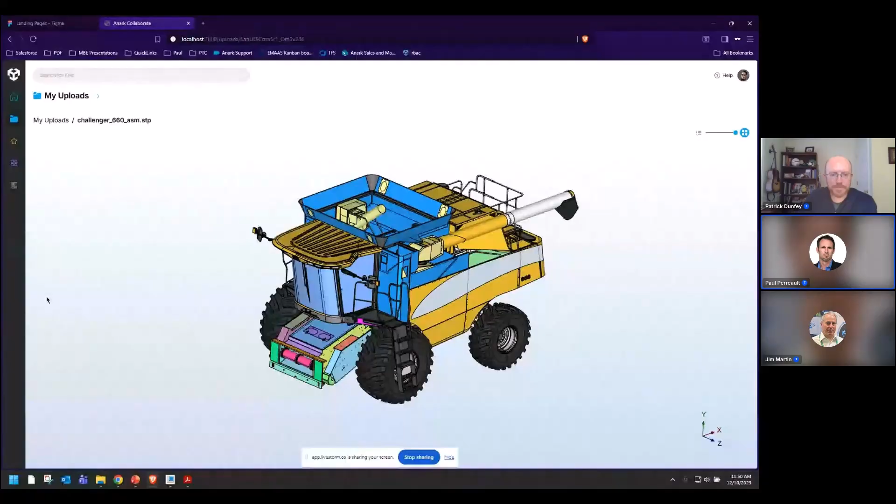We're going to take advantage of all the available screen real estate, and hardcore engineering and manufacturing data will take center stage, along with this extensibility story where we're going to be able to build and deliver apps within this environment. So let me go back to our slide deck, and I just want to touch on a number of things we've done recently.

Added support for Creo 11. We are work in progress to support this new object type in Creo called Creo Tables. We've made a bunch of performance improvements. We've added a brand new watermarking capability. There are new advanced MBD formats that we've added.

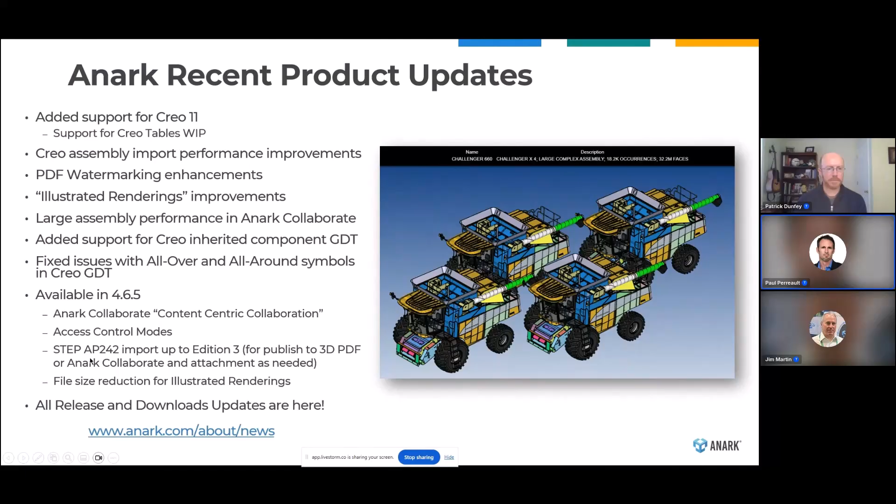So this is going to dovetail into the next slide. Specifically for our Dassault customers, we have added a brand new STEP AP242 translator, licensing a toolkit from Dassault Spatial. This new option is tuned for Dassault environments, so CATIA V5 and the 3DX platform.

We've also developed some CAT scripts to extract stacking tables, composite ply tables, things like that. Some of our customers are utilizing those. As Patrick mentioned earlier, we continue to add to the mature, robust, and deeply integrated extraction solutions we've developed here at Anark for a long time.

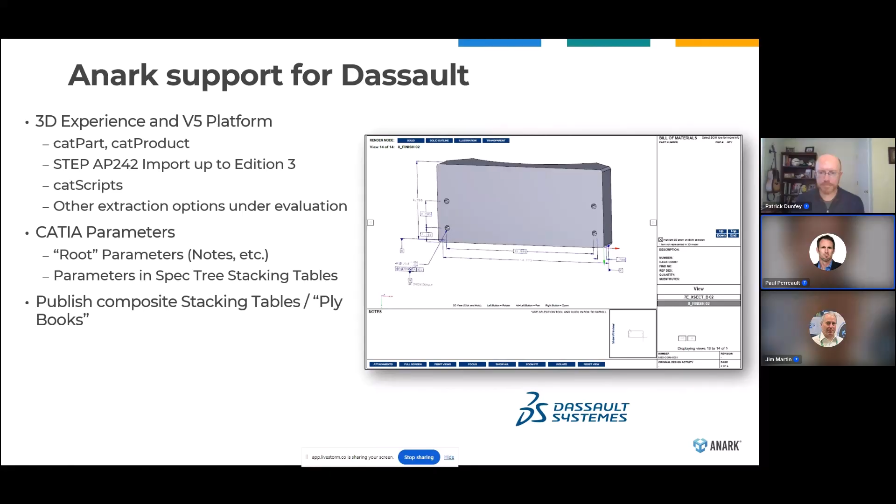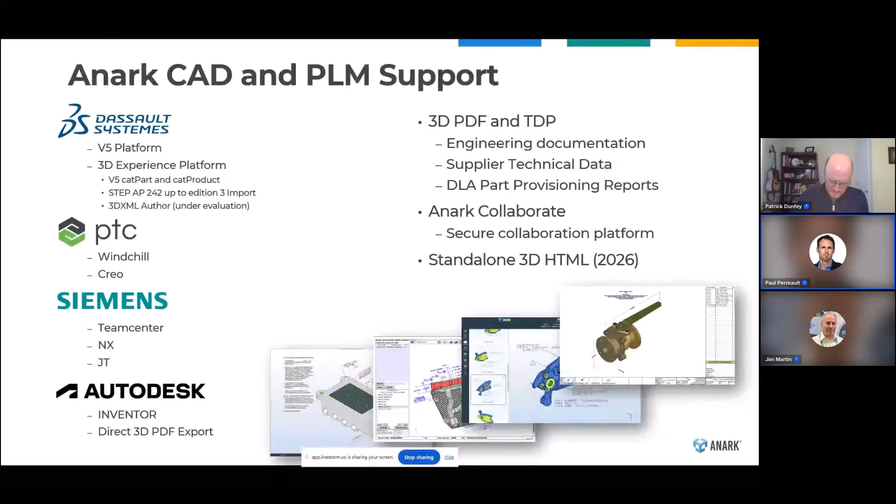As you've seen, continuing to add capabilities into the Collaborate solution. We're also going to be supporting a standalone HTML solution in 2026, and we'll have more information to share about that next year. Generally, embracing this laser focus on hardcore digital engineering data, being able to publish it into standards-based formats to democratize access to it, but also restrict access and make sure people have secure environments to view and interact with data without having to take possession of an artifact. So in a nutshell, for 2026, these are our three primary areas of work.

I use a lot of software tools, and there are some tools that I love to use. So with Anark Collaborate, we're making substantial improvements to the user interface, making it totally familiar to people who use tools like Microsoft Outlook and Box, continuing to focus on performance and security. Some of those things involve easier Anark Collaborate upgrades and continued performance improvements for large 3D PDFs.

We're going to start working on what we call server-side rendering for Collaborate, where that interactive 3D graphical display actually takes place upstream on the server. If there are any people who play cloud video games in the audience, we'll be utilizing very similar technology to that.

And then again, this focus on having API first, data first, extensible solutions that support our customers' desire to create custom experiences for the recipients of the data that they publish and make available. That will come in the form of what we're calling App Builder and templates, providing that closed loop feedback to PLM. We're going to be taking our first step to import data from some QIF files, and we'll have more information about that early next year. And then, as I mentioned, HTML to disk.

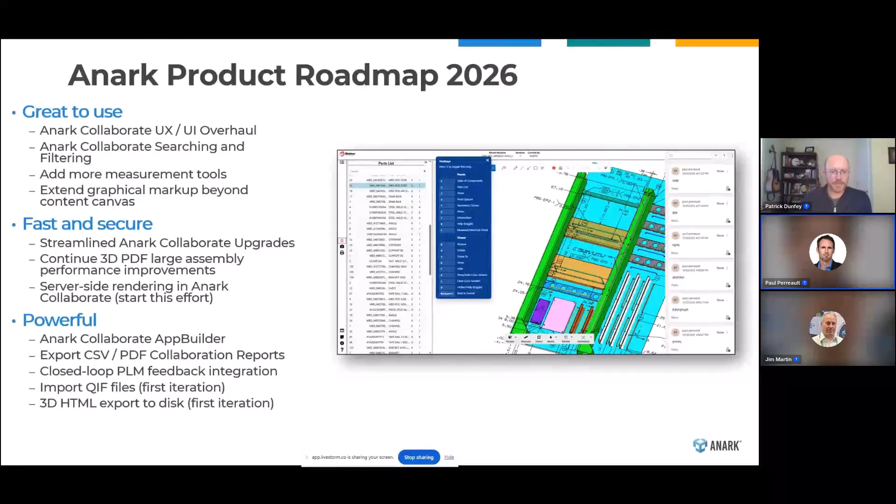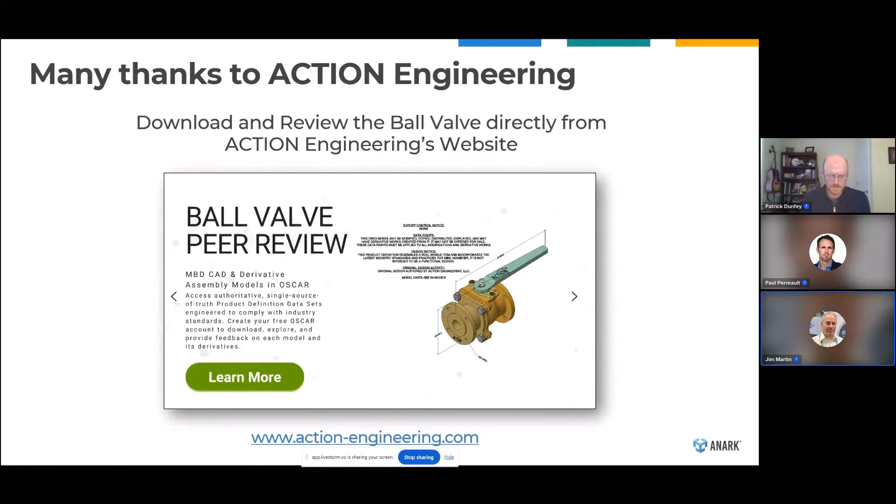The one thing we wanted to do first off is thank Action Engineering. If you haven't seen it yet, they had a project where they created a ball valve assembly, and they want people to go through and download all the original models, which are in Creo, plus the derivatives that some of them are coming from Anark. We've been showing this model with the Action branding on it, but they're actively encouraging people to do this. This is going to lead into the MBE Summit next April at MXD, where people are going to be doing a lot of different scenarios surrounding this ball valve. So thank you to Action Engineering.